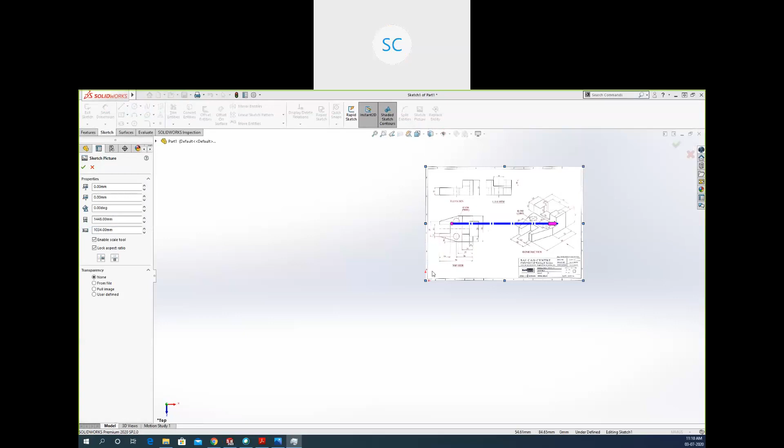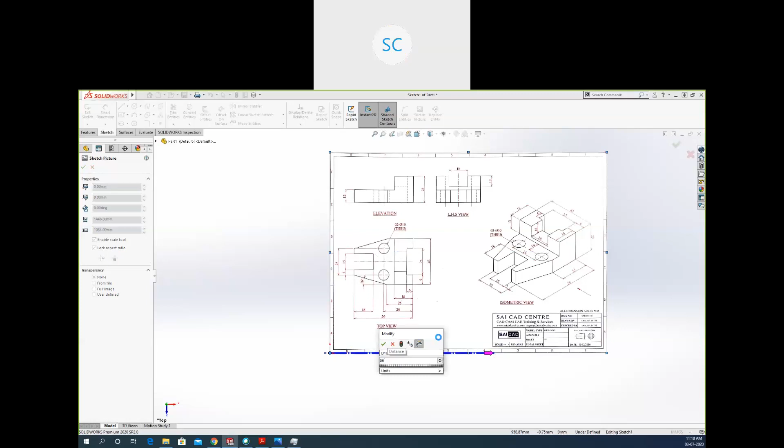So first of all, I have to insert the picture. So I have selected the sketch picture from here. And after inserting the image, I just need to scale it. So I can see the maximum length is 56 here. So I will just select this arrow from here to here. I will define this value to be around 56, and the drawing will update automatically. So click OK. Now if I create any drawing, it will be created for 56.

I can just move it like that. I can place it somewhere else. Okay. So now, to create the drawing, we have this origin here. Now I have to create only this view. So for that, first you have to assume from where you are going to start. So I'm going to start from the mid. I will just create the half object and I will just mirror that object to the other side.

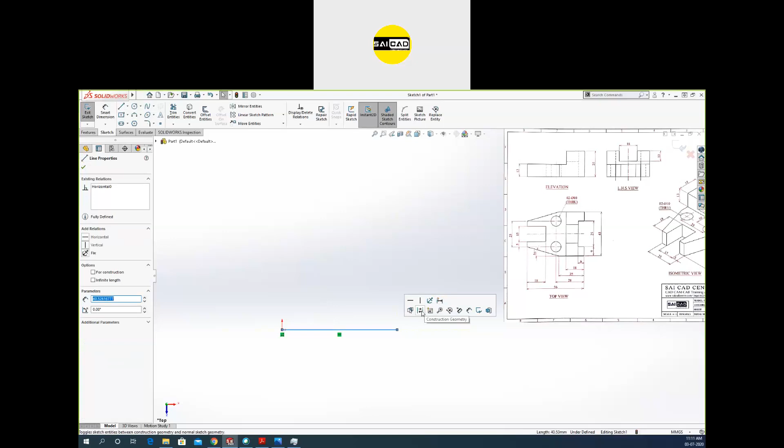So first of all, create a center line and convert that to reference or construction geometry. After that, create a line. You can use L for shortcut. Then I'm going to create it from this side. Okay, like that. And I want to create it somewhat like that. Okay, so what should be the relation?

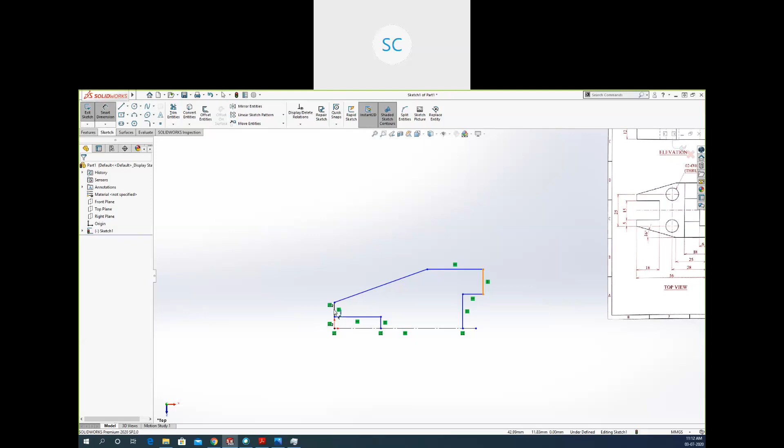This line is by default in relation with this point, that both of them should be aligned in a linear way. Okay, and we have to define the dimension now. You can see the relation is added for vertical, horizontal, and coincident is added up to this point. So define the dimension. So maximum value from this point to this is 56. So define 56 value. Now we have a value here, this one, that is 18. So define that value to be 18.

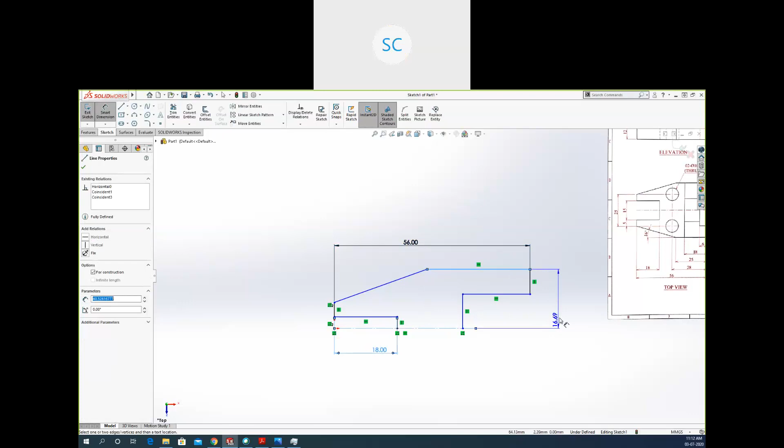Now we have maximum value for this one, that is around 43. So 43 divided by 2. Then we have internal gap, that is 25. Okay, 25. So that will be 12.5, or divide by 2, whichever you prefer.

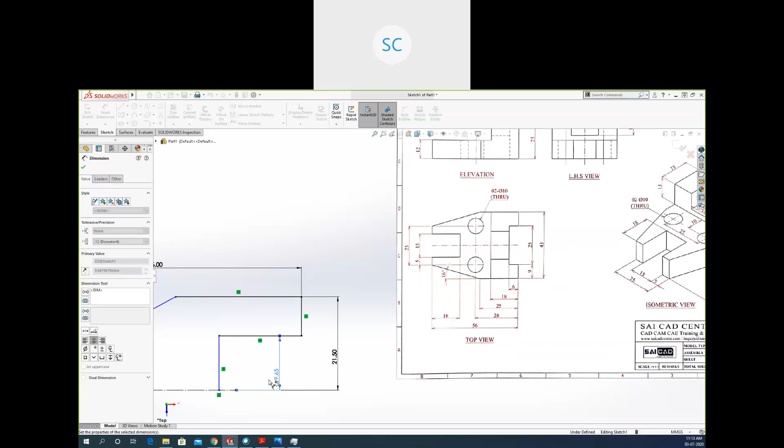Then we have the next point, that this distance from here is 25 also. So define that. Okay, you can see it is again selecting the bottom. So press escape in that case and you can see the dimension will be only for that line. So define 25 again. And we have an angle here, 16 degrees. For that I will just define that this angle is 16 degrees.

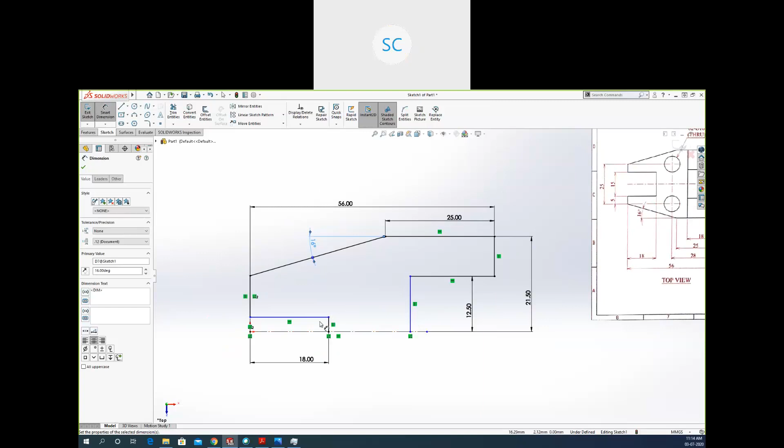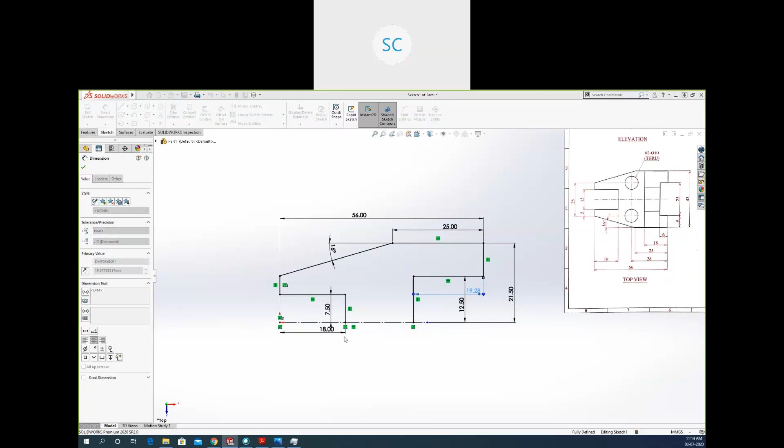Okay, so last two things. First one will be the gap between here and second one will be the gap from here. So this gap is 15. Okay, I can just select these two lines. The gap is 15, which means it will be 7.5. And for here, the gap is 6. So define that value to be 6. So like that, I have created a half object.

Now just go to the mirror entities, select the object, select mirror about, select the plane, the axis, and click OK. And the object will be created. Okay, one thing that is missing here will be the circle. I should have created the circle here, and that too would have mirrored to the other side. So let's create it now.

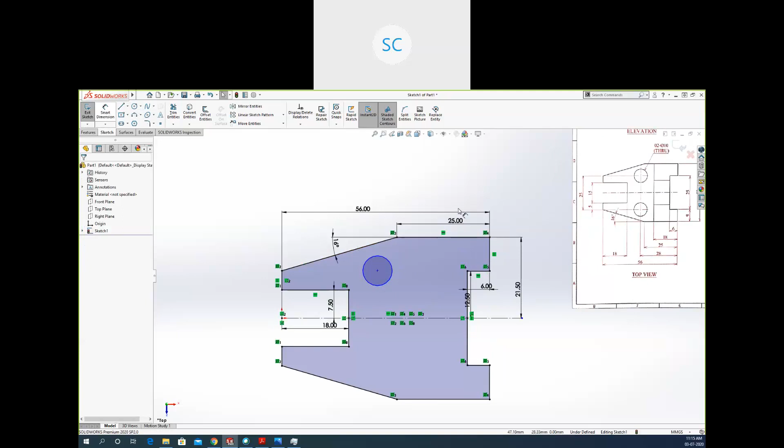And find that circle. Circle has a diameter of 10. Okay, so radius of 10, sorry, diameter of 10. And the distance is 25 height from here and 28 from here. So select that gap. So 25 means it will be 12.5. And 28 from here. Okay, define that value. 28.

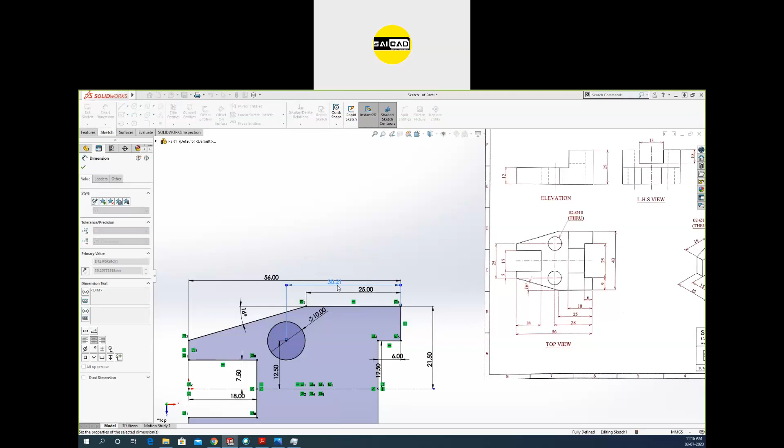Just move this 56 to the upside like that. Define your dimension accordingly. You can just move it backwards. Okay, and a little bit. So here we have the shape. Let's just mirror it. Mirror entity, mirror about. Okay, so circle is completed.

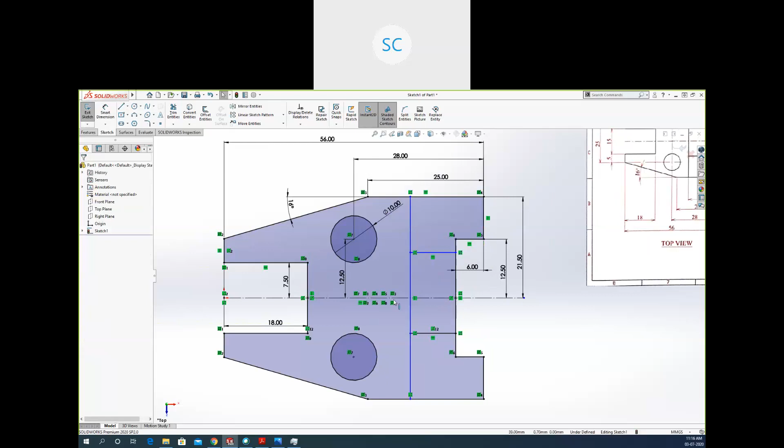Now we are left with some lines. So first line is from somewhere here, and second line will be somewhere here. Okay, you can mirror this line, or you can create another line and define another relation for the mirror. In the mirror option, you can see we have some relation. We have all the relations defined like that. This relation is called symmetrical. We can define that manually also.

So how to define that? For that, you can see this is movable. This is also movable. Both can move separately. If you want to define them, you can just select these two lines by pressing control. And the third one will be the axis. When you select two lines and an axis, there will be a relation called symmetric, and you can apply the symmetrical relation. Now, if you move one, the other will also move according to that. Okay, that's the symmetrical relation.

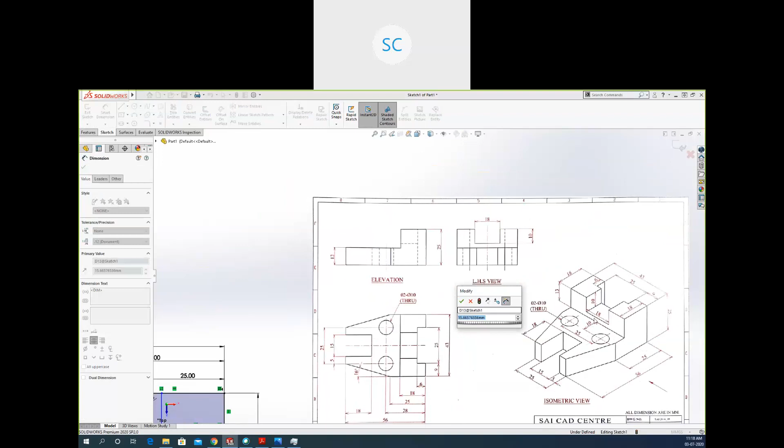Now I have to just define one dimension in between. I can define the whole dimension, or I can define the half dimension. That depends on me. So here we don't have any gap. So the gap will be in the other view. And if I see here, the gap is 18, or I can see here also, the gap is 18. And the line is at 18 gap. I can see that from here.

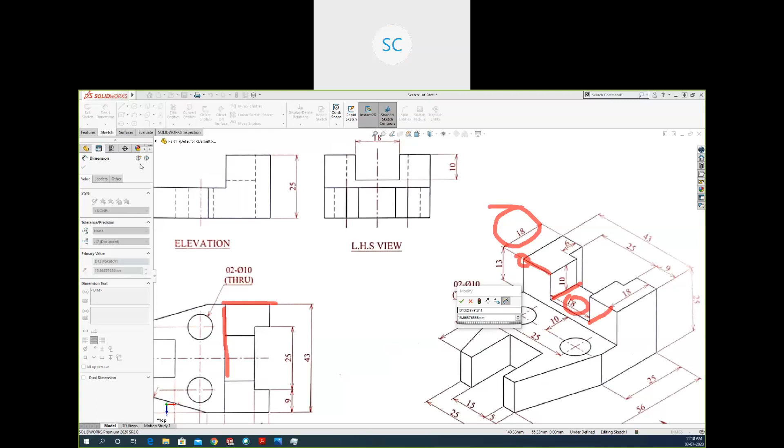Okay, this one 18, because we have a line here, this one. So that's the edge. The first edge is this one, so the gap is 18, and the between gap is 18 from here to here. Okay, let's define that gap. Both the gaps are 18. So you can see both the lines are in black now, fully defined, and for this one we have to assign the value here, that will be 18 again.

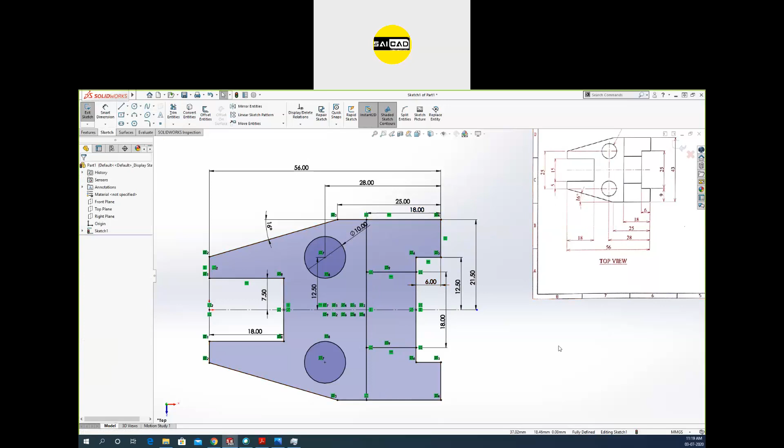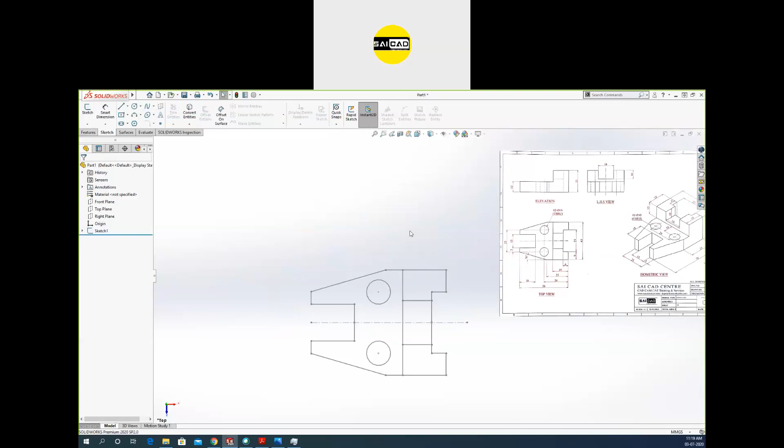So this is the sketch that we need. You can see that both the sketches are similar. There is no difference. Okay, if you have any question, please ask your question related to this view. Is there any question? Okay. So let's exit out. Here is the shape. Okay, so like that you have to create your sketches.

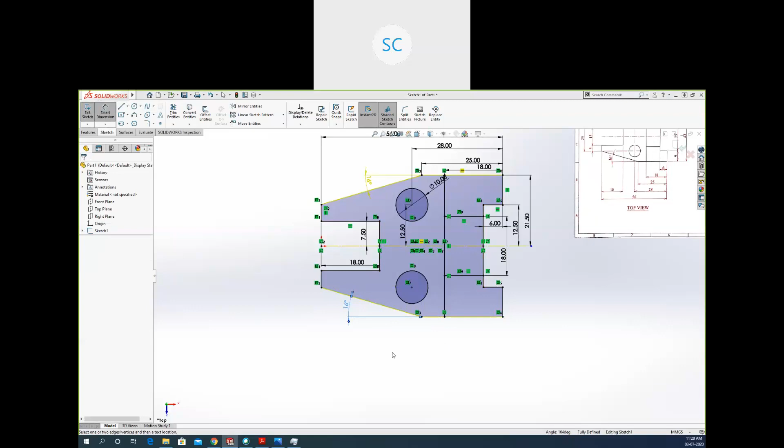Overdefined means if you apply multiple relations or multiple dimensions to one entity. Like, I know that this line is symmetrical, and there is the angle 16 degrees. If I define an angle here, that angle will be overdefined. You can see that it will turn yellow.

I just pressed escape. I should have just clicked here, and there would be the option. Okay, so like that you can see I have turned that to be driven. If I had made that driving, that would have some error or be overdefined.

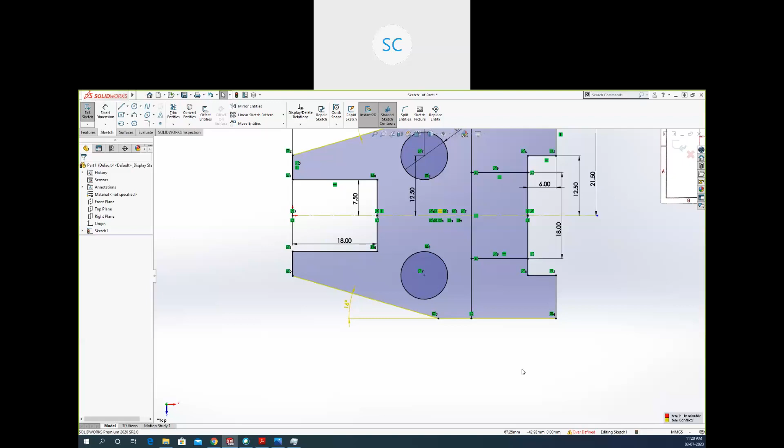Okay, there are two options. If you want to create an object over driven or driving, if I want to create it driving, then there will be an option that item conflicts, or the red one, item is unsolvable. So you just have to check where the overdefined is applied and just delete that relation or that dimension, and the object will be fully defined again. Just check from here also.

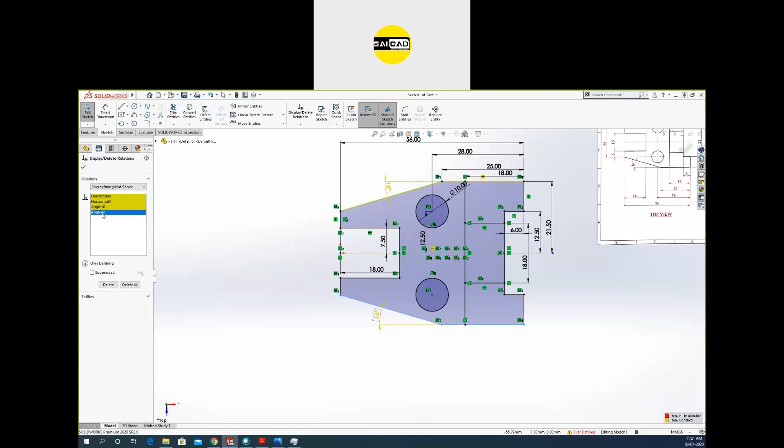Or what you can do, you can go for an option here that is called display and delete relations. Click on this one and you will see all the values that you have here. Okay, so see, for some similar values there are two angles and there are two horizontals. So if you see, the horizontal is here. I need this line to be horizontal, that's okay. Second horizontal is here. I want this line to be horizontal, that's also okay. Then we have an angle here and we have an angle here.

Now we have two angles. I just need one angle. I don't have to apply two angles because I have created this shape with symmetrical relation, or with mirror. So that's why I have to delete any one from here. So I will just select the second one or the first one and delete that relation directly from here, and our object will be fully defined. Okay, so like that you can remove that over defined option.

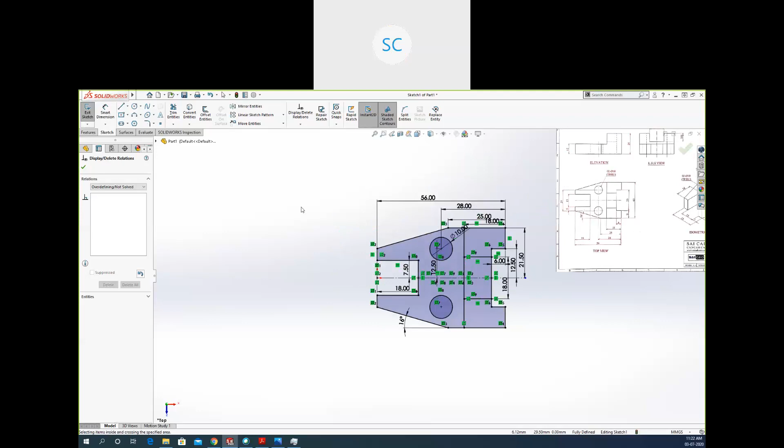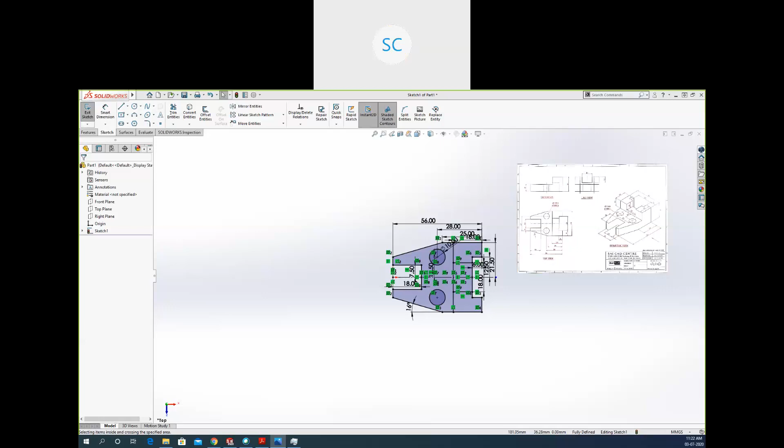Okay, so we have covered these options earlier. We have also used the trim, we have used offset, we have used the mirror entities. Now if you want to use the pattern option, you can do that also. For the pattern, I will just select another drawing. Let me just insert a drawing. Okay, so I have a drawing here. I want to create only this circular face. I will not create everything. I will just show you how to create these multiple circles.

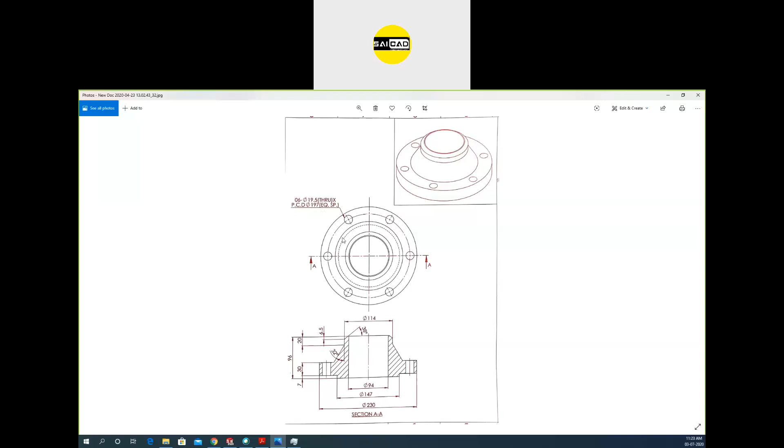Okay, so the outer diameter we have is 230 and the innermost will be 94. So I'm going to create only two circles, 230 and 94, and I will create this circle that is 19.5 in diameter. So how to read this specification? This is 6, that is number of items, 6 number of items at 19.5 dia. All the circles have a diameter of 19.5. Through means the hole is through. You can see here the hole is through. There is no material left.

And this X is multiply. Okay, and PCD means pitch circle dia. That will be this circle, the red one, on which these circles are constrained, and that dia is 197. This one is the diameter of 197, and equispaced means equally spaced. All the circles have equal space in between them. In this case, there will be equal angles. Okay, so I'm going to create a 230 dia, 94 dia, and 197 diameter.

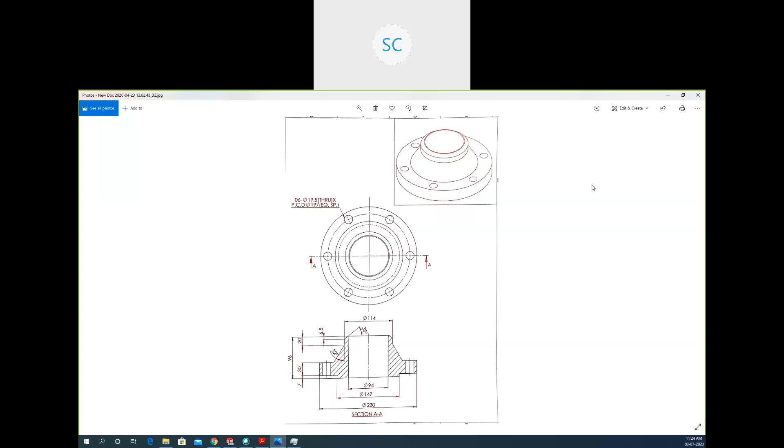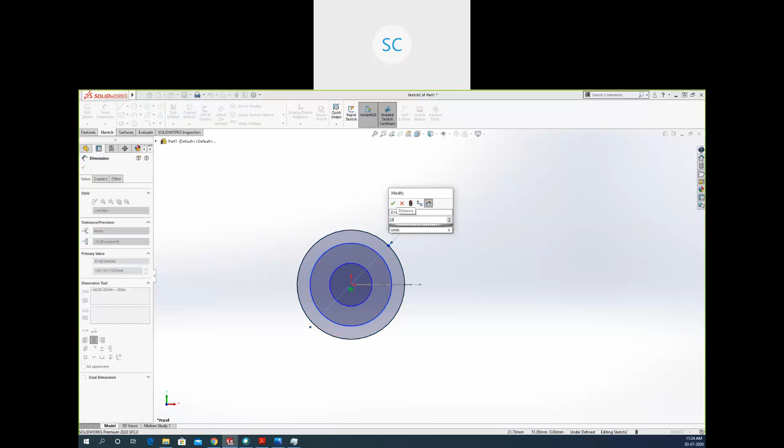So first of all, I will exit out from this sketch. I will just take another plane and create a sketch there so that there will be no conflict. So I will just select the circle command. From here to here, I have to create 3 circles. So first of all, just create the circle, create the shape, and define one dimension only. This will be 230. So all the shapes will be updated according to that. Your shape will not change. The dimension will update, but your shape will not change. You will get the required shape directly. In other software like Creo, your shape would have been distorted from here.

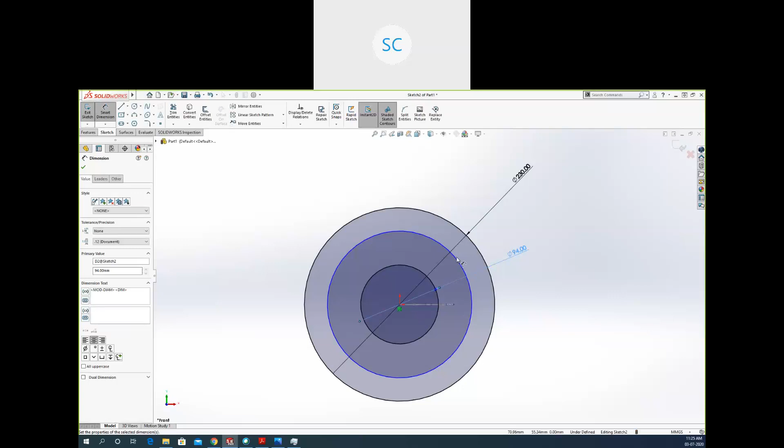94 diameter, and this one will be 197. Okay, so I need this circle to be construction, and I need a circle here at this point. So you can see there is a quadrant. When you go there, a relation will be added called coincident and horizontal. Or you can do one thing, you can create it outside. So always try to find the direct place here so that you don't have to apply the relations later.

You can just define the relation like coincident. You can define the relation that will be horizontal, and after that you just have to define the diameter. Okay, so always try to find the exact location first. Always try to do that, or if you don't do that, you have to manually specify the relations. So we need here a diameter of 19.5, and here is the circle. So you don't have to create every circle manually.

We have the option here that is called the pattern. You can create the pattern in two ways. First one is linear. You can create it in X and Y direction. So you can see this is the X direction. The gap between them, I want to take that gap to be 25.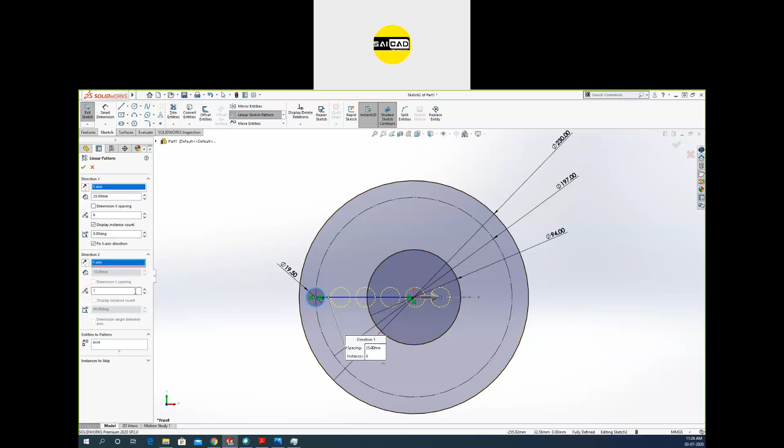Object should be 6. I have selected 6 objects, but I don't see any object here. For that, I have to select the entity to pattern. This one here. Okay, you can see there are 6 objects on this side. And in the second Y direction, I have only one. So I can just increase that also and define the between gap to be 25, like that. So I can create this type of shape from here.

Okay, this is the linear pattern, but I don't need the linear pattern now. I just need the circular pattern. So go for the circular sketch pattern.

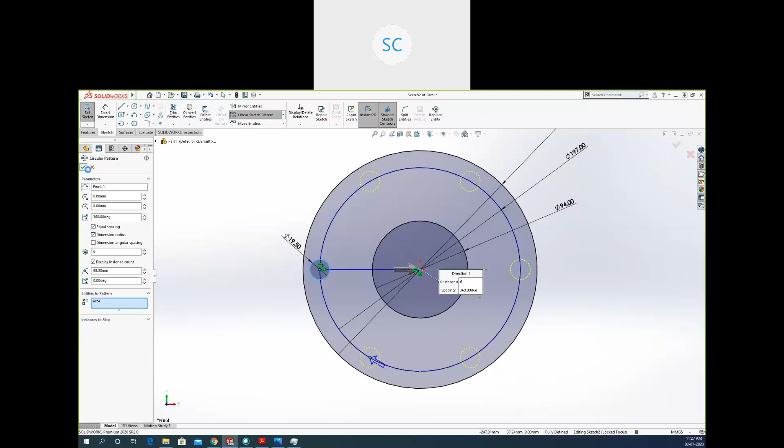Select the center axis. So center will be this one. Select entities to pattern first. From here you can see we have number of items to be 4. I need that to be 6. So you can see the objects are created here. Okay, the angle is 360, and already there is equal spacing applied, so you don't have to apply that angle manually. Just click OK, and your circles will be created.

Now you can see everything is in blue. The first object is in black. Black means fully defined, and these objects are underdefined. So what you can do here is just select any circle and drag that circle. You can see I cannot drag it from the outside. Okay, then leave that and drag it from the center. So you can see the center can be dragged, and all the circles are in their position.

Just what is the error, what is the new thing here, what is happening? Their center, you can see, is this one, and I need that center to be here, but the center is movable, so I cannot fix it. So what you can do is just select this one and select this one and define a relation merge points.

Okay, that's not happening. So we need to add that to be coincident. So select this point and this point, and there is the option merge points. So sometimes, okay, it's not working. So do that manually, just go there and leave that here. Okay, that happened due to this dimension.

I don't need this dimension. Okay, you can see there is a dimension for 98.5. I don't need this dimension, so I will delete that, and now I can select these 2 points and define merge points. So you can see the object is fully defined. Okay, so like that you can create your circular patterns.

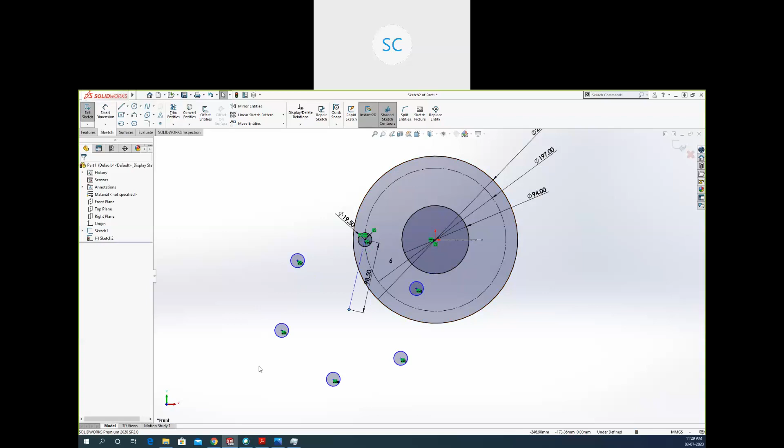Okay, let me show you again what I have done. So let's roll back a little bit. Okay, so here is the shape. I need that to be 19.5.

Okay, and you can just select the object first also, then go to the circular sketch pattern, and you can see it has automatically selected the center. If you select any object, the center will be selected as the origin directly. If you want to change the origin, you can just go here and select any other point which you need to be origin. Right now I don't have any point somewhere, so I cannot select, but you can select if you have any point to be center.

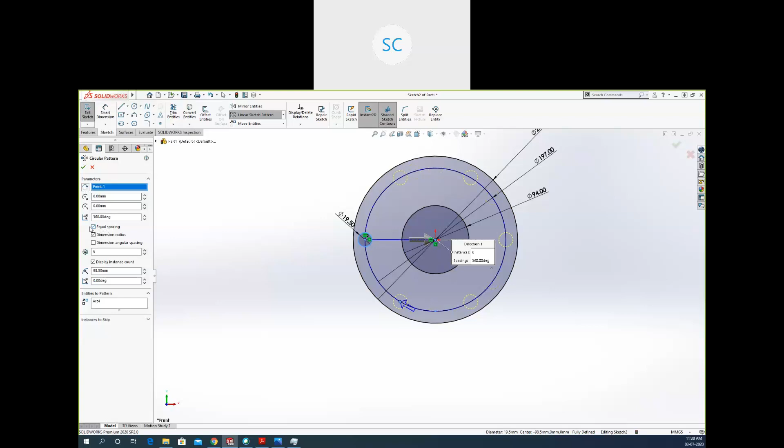Then define the number of objects you need. Okay, check this one, equal spacing should be applied from here. Okay, and after that just click OK, and your object will be created.

Now I don't need this dimension here, I can delete that. If I just move the object, you can see the object can be moved. So just pick this point from here and go to the center and leave that, and you will see it will automatically grab that relation, or you can define that manually.

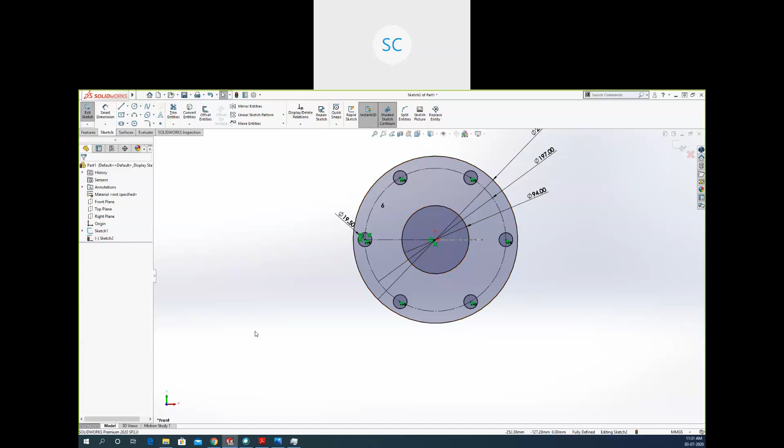Yes, I have created that at the PCD. This circle was defined, but when you create the pattern, it needs a relation, so you have to define that relation. Okay, only one relation needs to be defined here after the pattern. So I have just defined the relation coincident to this center point. So exit out, and here is the shape.

Okay, so like that you can create your sketches. Whichever sketch you want to create, whatever type of sketch you need, just select it from here. Okay, so this was the sketch.

Now I have created an assignment for you. You have to create this assignment on your computer. So wait a minute, I will show you.

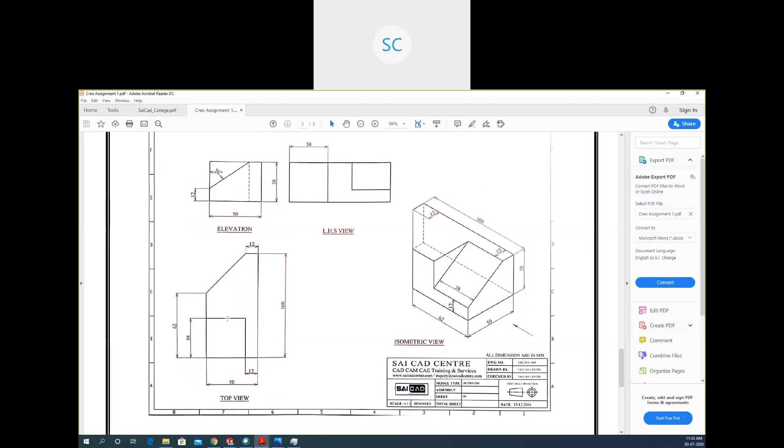Okay, similar, first one is this one. I have created this one. I will change the drawing in your assignment. You will get these type of shapes. You have to create your views directly here, and you have to create all the views in a single drawing. Just create 3 views only, and in the first also you have to create all 3.

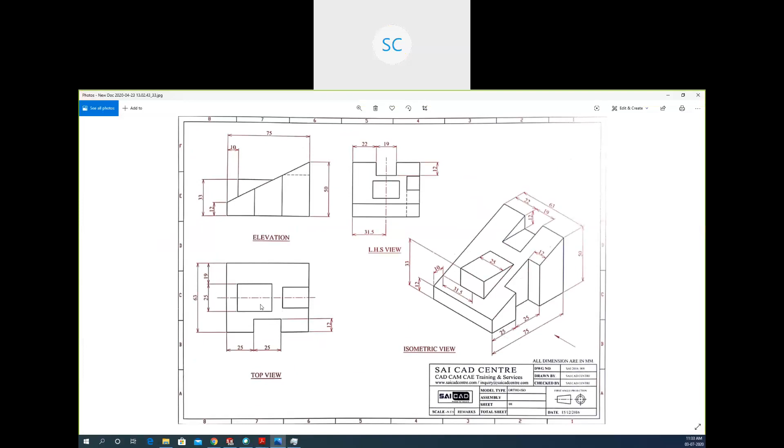I will change this drawing. You will get some other drawing from here, like this one, I'll show you, wait a minute. Okay, you will get like this one or this one. I will see what I insert in your assignment. So you will get these type of drawing. You have to create its views.

You don't have to type the name here, top view, elevation, left hand side. Just have to create 3 views, and the views can be created with the help of projection, or you can do that manually also.

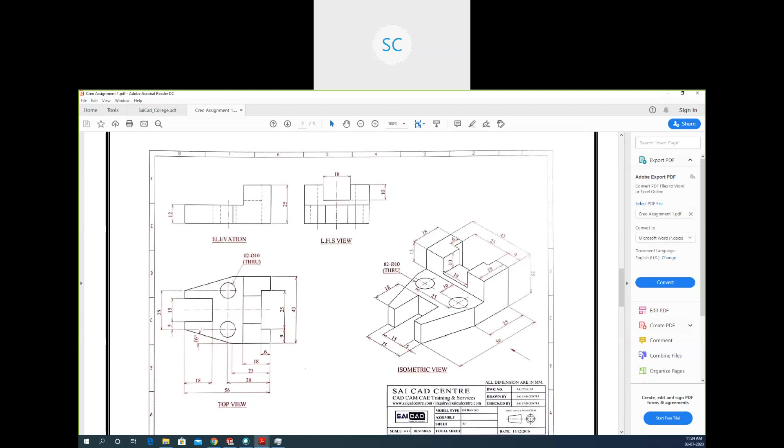So how to create the second view? Like I want to create this elevation, so how to do that, in same drawing, or you can do one thing, that you can create that view in a different view. Like I don't need this one, I will just delete that. So I have created my first view here.

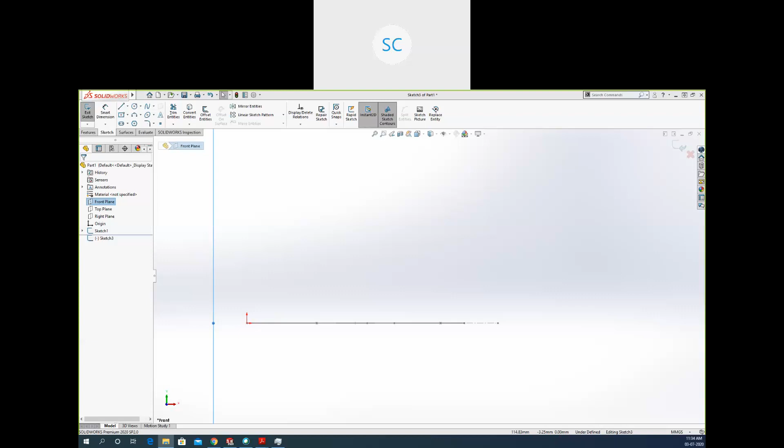To create the second view, I can just go to the front, go to the sketch, and I can create that view here. The view will be this one. So you can see I need to create an L shape here.

Height will be 12. This edge will be coincident to here, and this edge will be coincident here. So an L shape with 12 height, 25 height here. This gap will be projection of this one, or the gap 18. And we have 12 here, so an intersection should be made here.

This solid line will be the edge here. This edge will be this solid line, and this line will be this one, and this edge will be this one. What is this dotted line? This dotted line will be this one, and this one will be this line.

But downward line, this one. So you will have the height here, 10 height. And for here, you can see there are three dotted lines. So the first one will be for this one, this edge here.

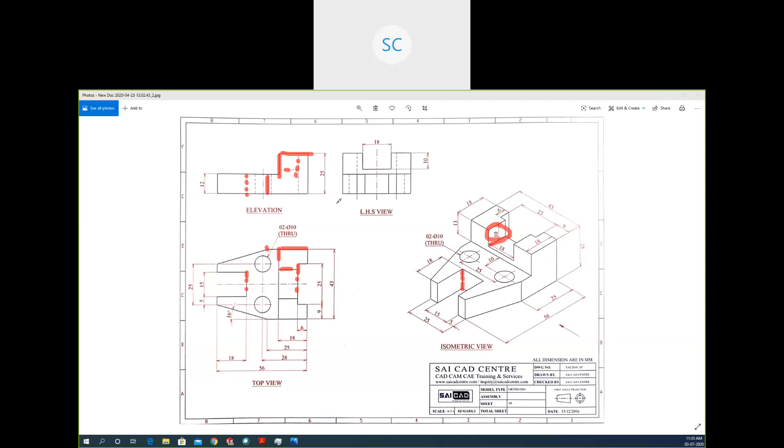No, you don't have to create the isometric, you just have to create these three views only. So like that, you have to create this. I will show you for this drawing, you have to create for the other views that you have been given in the assignment. So let's start here.

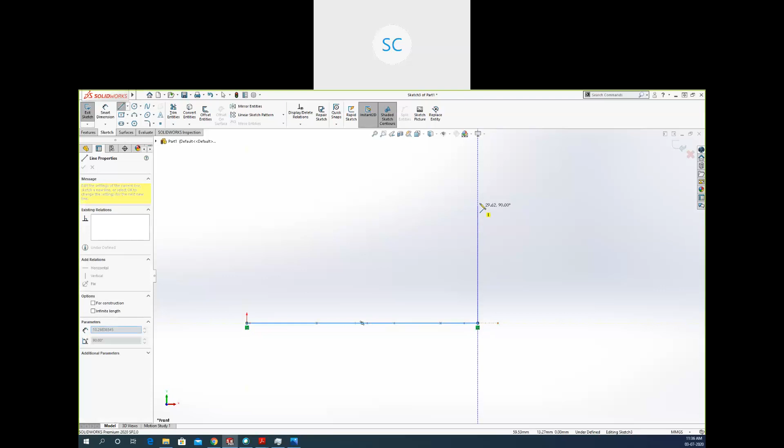I will create with the help of a line. I know it will go somewhere here. I will create a line like that, an L shape. So the gaps will be, I have the height here that will be 25. I have a gap here that will be 12. I know that this gap should be 18.

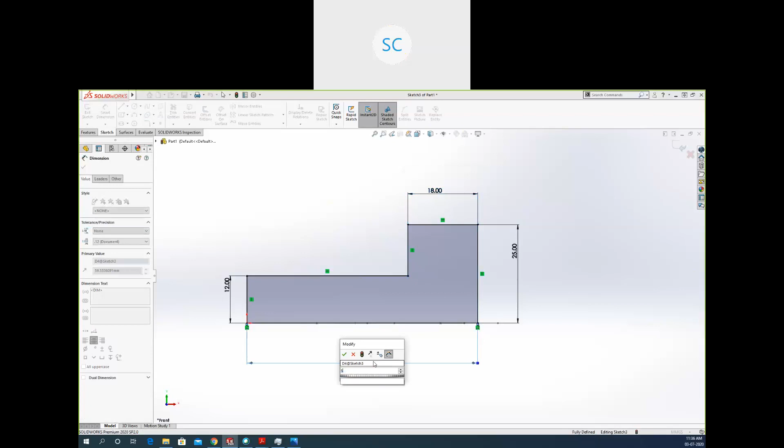And the total length we already know that is 56, or I can make it coincident. If I rotate it, I can make it in relation to this one, but there is no relation. That's why I have selected this 56 gap. Okay, you can see that we have created the L shape.

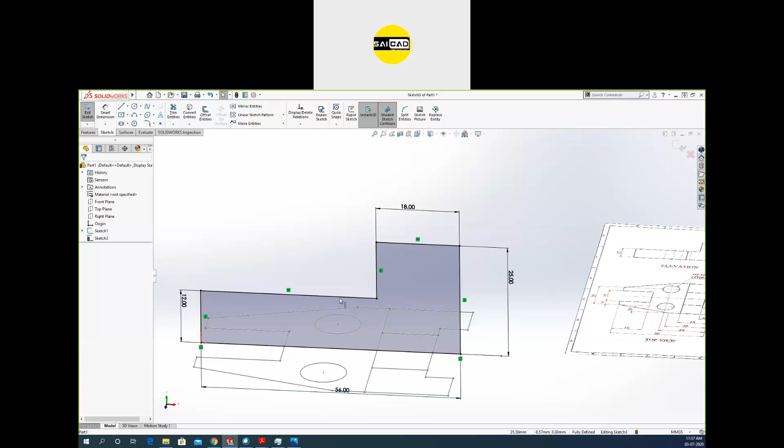Now we need to create some other projections. We need a projection for this edge, this one edge here. For that, I will just create a line like that. So that should be this one, and that edge has a value of 25, so the value will be defined from here.

So this will be the solid entities. The first one was for this edge, the second one was for this edge, the third one was for this edge. So we have three solid lines, and this one bottom entity, this one top, this one the edge. So like that you have to create.

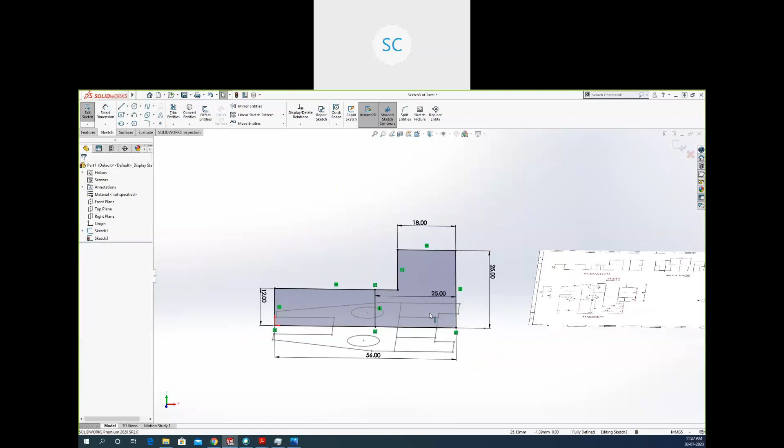Now you have to create the internal, like we have this edge here, so we need to create a line somewhere here, the construction line. We need to create a line somewhere here. So this line will be construction, and we need to create a line over here for construction, and we need some internal lines also.

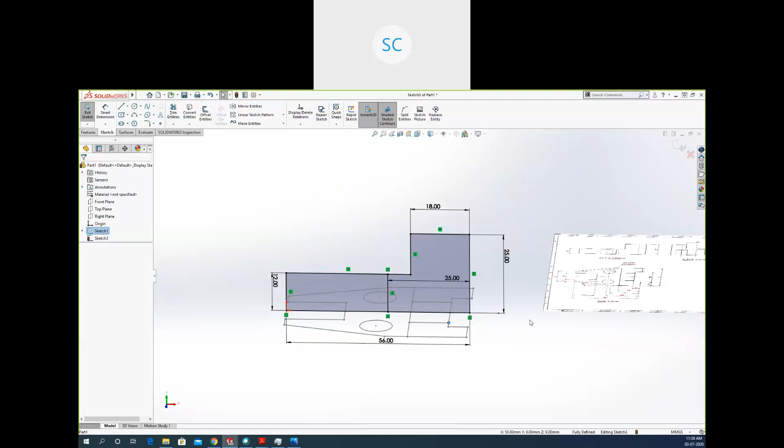So you have the view, just create the view and see the values from other views directly. So I'm going to define the first line will be somewhat here, the second line will be somewhere here, and third line will also be there. These two lines will be for the circle that we have somewhere here.

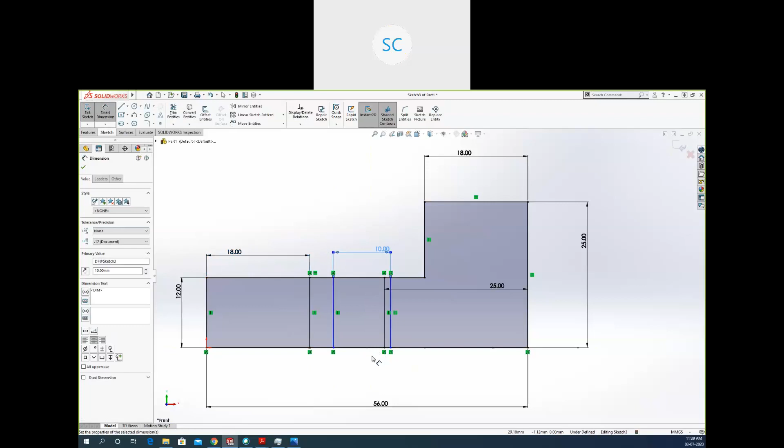So we have this line here, the gap is 18. We need to define the gap here. And we have the diameter, so define the internal values, that will be 10 diameter. And that circle has a center from 28 there. So right now we don't have a center, so I will just select the outer edge, and that value will be 28 plus 5, that will be 33.

Okay, so we need to define those edges to be construction from here or from here for construction. And we need to create some other edges. So the first one will be there from here, the second one will be somewhere here.

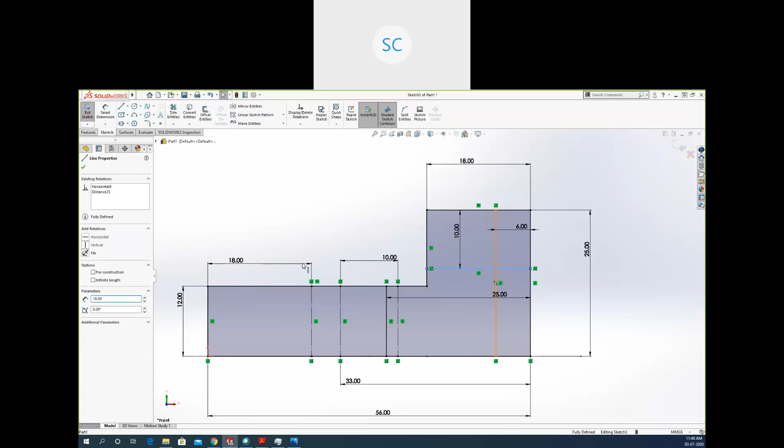Okay, so define them. We need to define that gap will be 6 millimeters, and this gap will be 10. We have been given that gap. So select both the lines, make them construction, and you will have your shape.

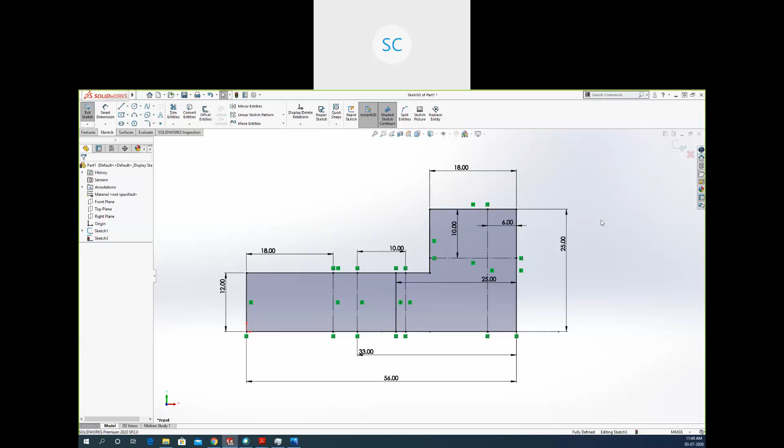Okay, if you don't want to see your dimension, you can just go here to this eye and uncheck this dimension. So you will see your object without dimension. If you check that for the dimension, you will see your object with dimension. So this will be the view.

Okay, if you need to define a center line, just create a line here if you want to, make that for construction like that, and define that dimension from here to here. This will be 25, or sorry, 28.

And we need to define these two lines symmetrical to this one. So here you will have a second. Okay, actually these two lines are construction, so you just have to remove that from construction first.

And after that, you can define the relation symmetry. After that, you can remove them from the solid to construction. Like that, you can create your shape, this one.

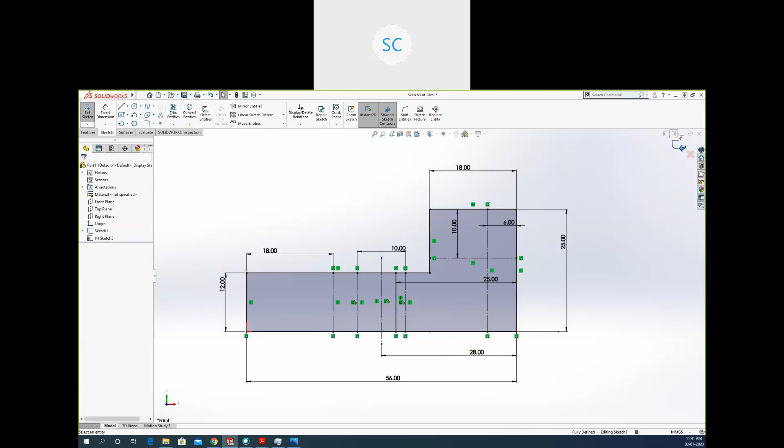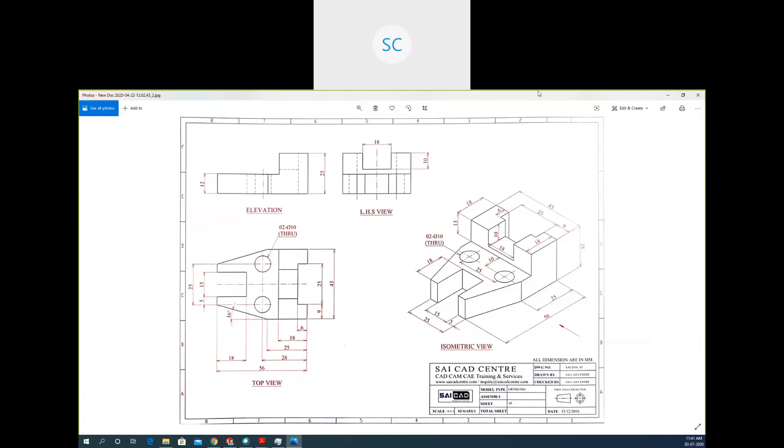Okay, for the last one, you just have to create that in the right plane here to create the sketch. So you just have to create the shape here. The third one, this shape will be created. I'm not going to create that, you will have to create that manually. Like I have created these two, you have to create that third one also.

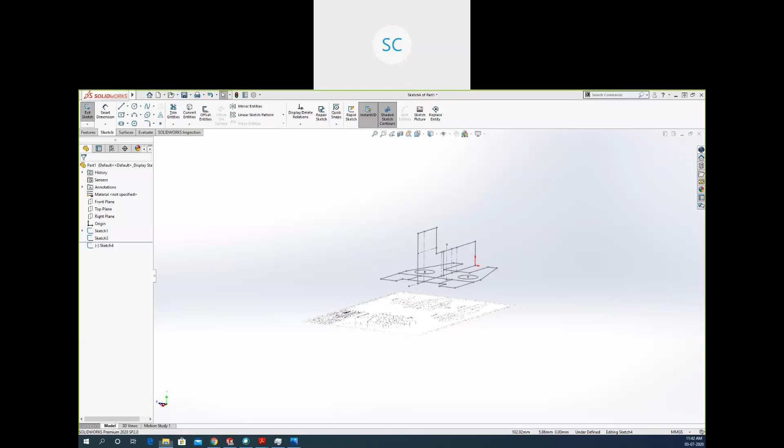Okay, so create that assignment and submit that assignment to our email ID. For that, the email ID will be... let me show you. Okay, there you will have this option, assignment one.

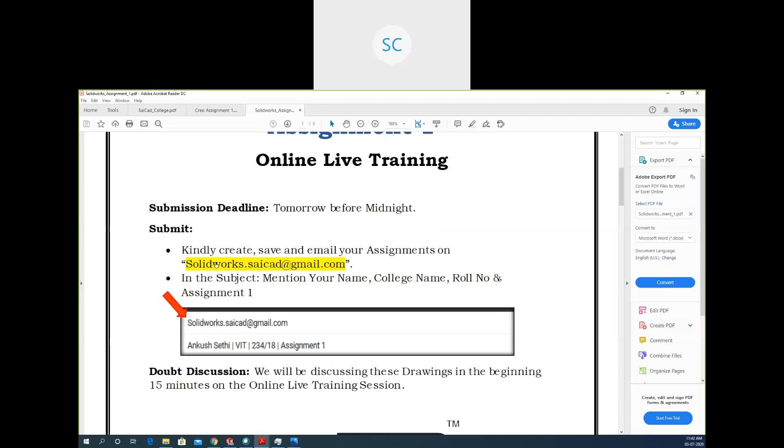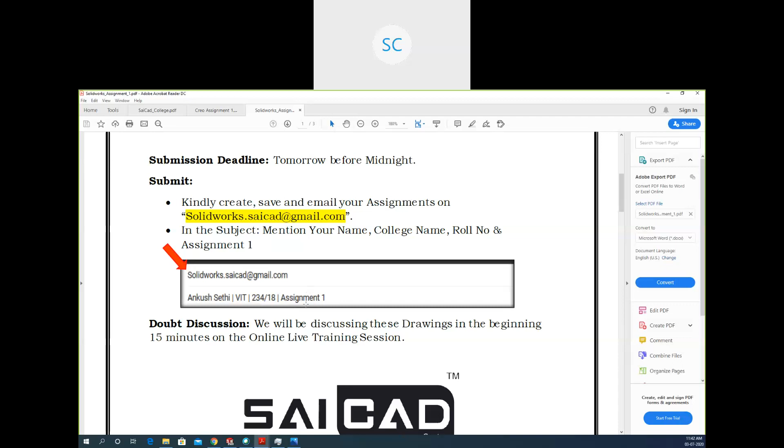The name is assignment one. The email ID will be solidworks.saicad@gmail.com, and you have to enter the email ID here. In the subject, you will have to type your name, your college, your roll number, and your assignment number will be here, assignment one. You have to attach the file with the name assignment one or A1, and drawing number one, for that will be D1.

Okay, for two, drawing two, that will be D2, so A1 D2 or A1 D1. A1 means assignment one. So like that you have to create your views. So I hope I'm clear.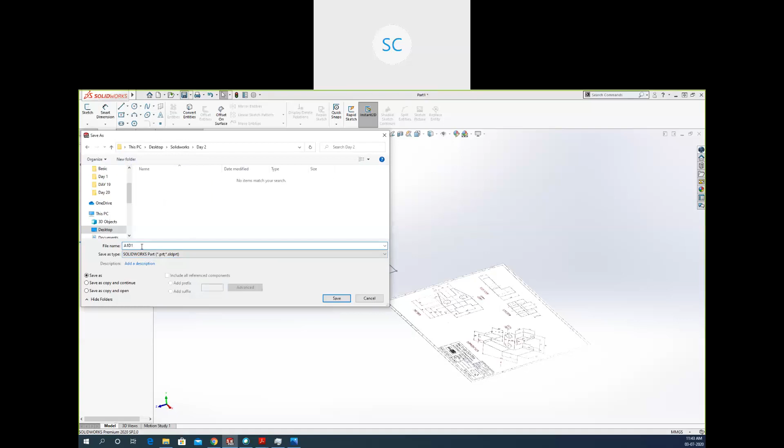So to save your drawing, you just have to go here in save, create a folder. In that folder, save your drawing with the name A1 D1, meaning assignment 1 drawing 1. Click on save and your drawing will be saved. If you go to your folder, you will see your drawing will be here.

Just drag this and drop into the mail and submit this assignment. Is there any question?

Is there any question related to the sketch I have created, or any option you want to know? Is it clear, everything that I have shown you today or yesterday? I hope you will be able to create this because I have covered all the tools. If you face any problem, you can ask that in the next session.